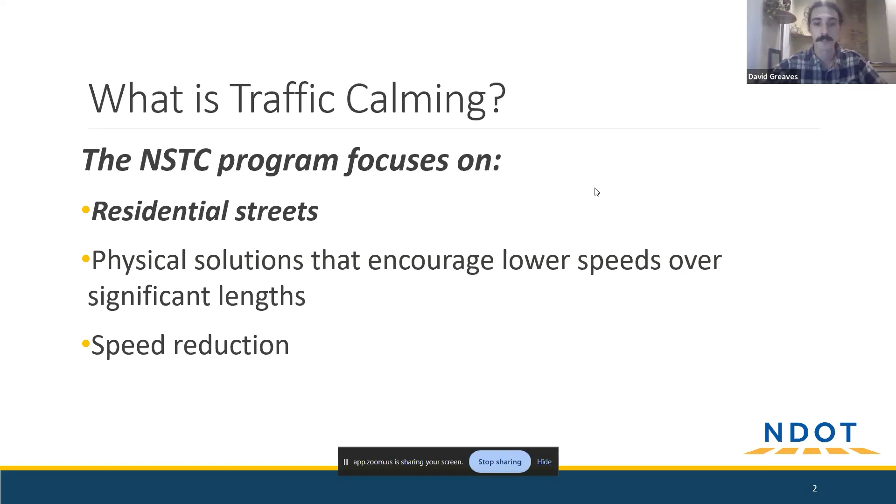I know that a lot of you were at meeting one, but some of you were not. So we're going to quickly cover some of the higher level program information, and that starts with what is traffic calming. The Neighborhood Street Traffic Calming Program, that's NSTC, is one that focuses on residential streets. We favor physical solutions to encourage lower speeds over significant lengths. Basically what that means is we don't choose one block at a time, and we're really shooting for speed reduction as an outcome of these projects, among other things.

There are 3 E's in traffic calming: education, enforcement, and engineering. Engineering is bold and underlined here because that's the piece that NDOT has the greatest ability to affect. So I'm an engineer. We're seeking to help McFerrin experience a better roadway environment with an engineered design, rather than only relying on educating people about speeding and driving safety. And certainly we don't want enforcement to be the only tool that helps people drive safe in your neighborhood.

This connects really closely with safety and Vision Zero. For anyone who's not aware, Vision Zero is the idea that nobody should have to be seriously injured or killed on Nashville's public roadways. Where this relates to speed is demonstrated by the infographic on the screen here.

Essentially it states that if somebody's hit while they're walking by a vehicle going 25 miles an hour, they have about a 90% chance of survival. Now, as that speed climbs to 35 or even upwards of 45 miles an hour, the chance that they live from being hit starts to go way down. So in neighborhoods where we know that people want to walk, particularly where there are things like schools and parks nearby, it's really important that we make sure people are following the speed limit and driving appropriately.

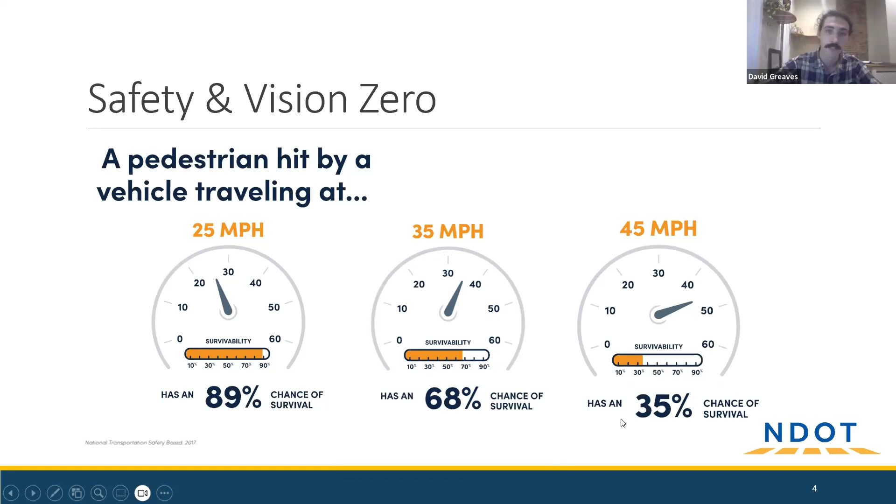Ideally, just having the speed limit would be enough, but often we see streets that experience high speeds, even though they are in neighborhoods like yours.

This is a really popular program. In August of 2024, when McFerrin was selected, we were choosing from over 500 applications in the queue. We were only able to choose 25 streets. Every 6 months or so, that's about the amount Nashville selects to do traffic calming. But what that means is out of all the streets that have applied for traffic calming, the data we collected and analysis we did on McFerrin made you all rise to the very top of that list. So that indicates to us that you do have a lot of cars driving on McFerrin, often at high speeds.

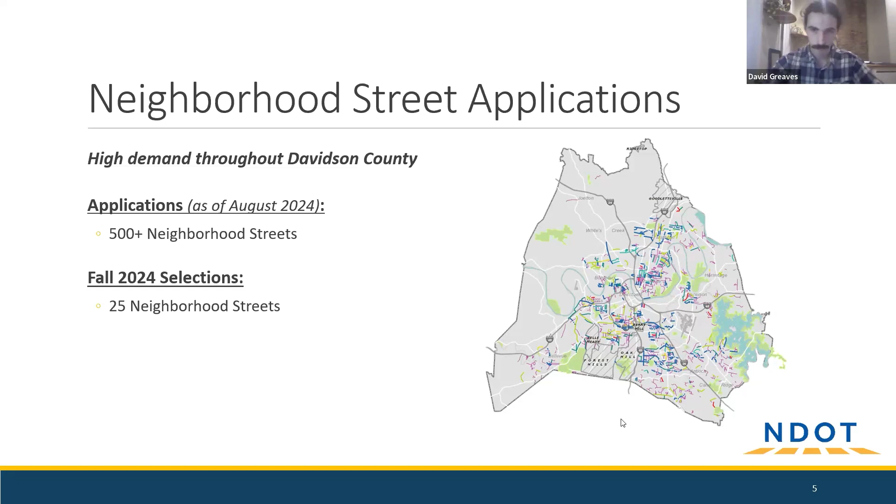There are a few things in NDOT's traffic calming toolbox, but a lot of other things that Metro does. So we want to take these meetings as an opportunity to publicize Hub Nashville. That's a number, a website, hub.Nashville.gov, and it's an app. All three of those are ways to basically make requests of Nashville's government. So it could be about traffic calming or road safety in general, or anything down to like potholes, debris, you name it. It's got a lot of really good resources on there to help people make requests.

This is the map of the traffic calming project. I believe these were the extents that were applied for, and it is McFerrin Avenue from Main Street on the southern end up to West Eastland Avenue on the northern end. We also see that we have 3 schools in the vicinity of McFerrin, and then Frederick Douglass Park is over to the west. I believe all 3 of those things were helping you all get prioritized for this project.

What we're looking at here is a screenshot of Nashville's online traffic calming tracker. You'll notice, in addition to the yellow highlighted line that's McFerrin, there are a handful of lighter magenta lines. Those are all other applications that we have not yet selected. The blue dashed lines are streets where we've already been able to install traffic calming.

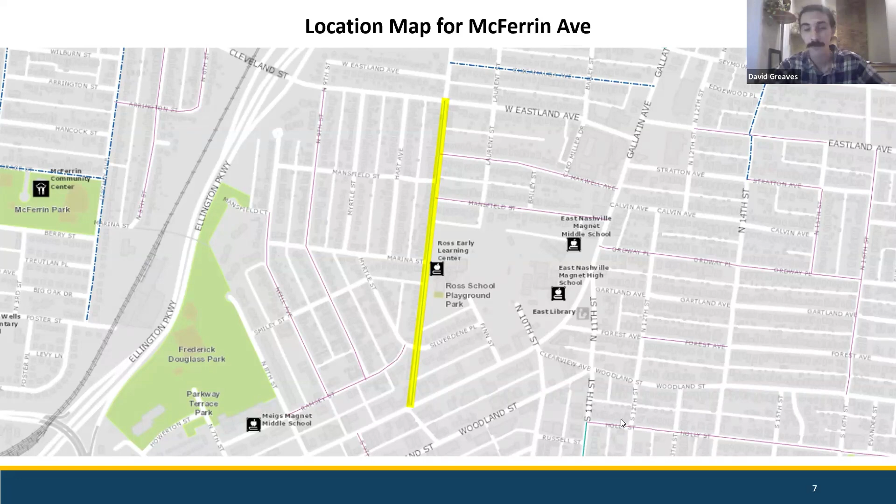If anyone is unfamiliar with what a project like this looks like, you could go over to Chickamauga Avenue, check it out, as well as North 14th Street. Or if you want to cross the tracks over into McFerrin Park, Lischey, Grace, and Meridian all have traffic calming installed as well.

In the last meeting, we talked about a pretty wide range of options. We reviewed a concept design that we put together. Now I'm going to present the measures that we ultimately decided on for the final design. But that doesn't mean we can't talk about or take questions on some of those other devices.

As is pretty typical in the traffic calming program, the core of this design relies on speed cushions. These work a little bit like speed bumps you might see in a grocery store parking lot, but they're stretched out along the length of the road to achieve a higher target speed. A speed bump is really for like 5 to 10 miles an hour. These are designed to be driven over at around 20 to 25. All that is to say, we're not asking people to really crawl over these.

We're essentially putting down devices that are intended to encourage people to drive at or around the speed limit. They're about 3 inches high, 6 feet wide, and on this particular street, we're going with 10.5 foot long speed cushions.

The width there is pretty specific. It's intended to basically be large enough to affect personal vehicles, cars, light trucks, that kind of thing, but have less an effect on larger vehicles with wider wheelbases, those being fire trucks and ambulances. They're not perfect, as certainly a fire truck may hit the tapered side area of the ramps, but they're designed to minimize the impact to those vehicles.

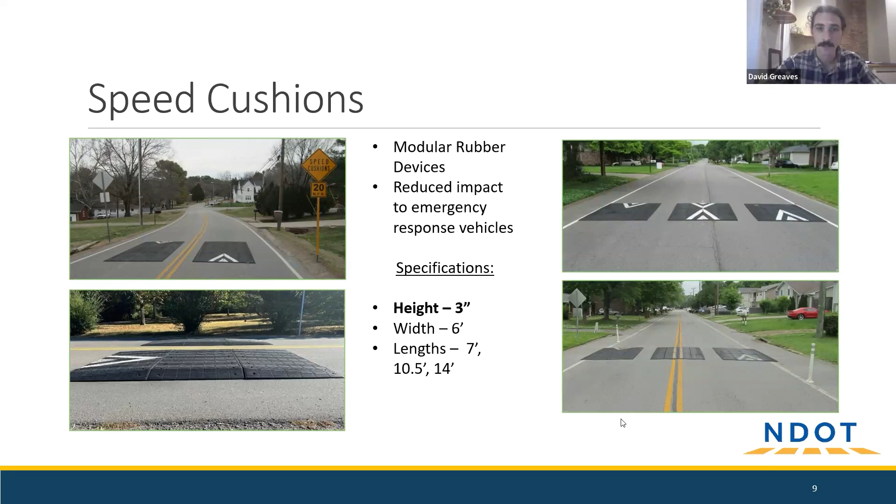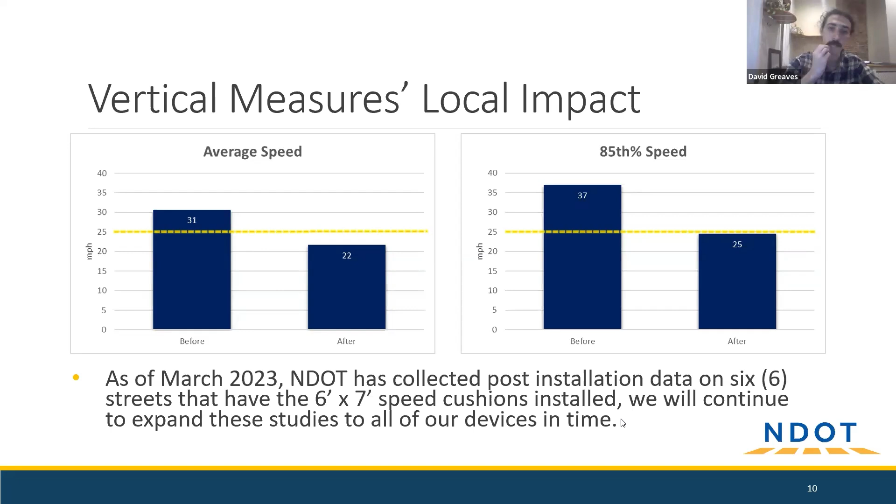I mentioned that we pretty often rely on speed cushions for traffic calming, and we do that because we know it's a fairly efficient investment of Metro's funds for infrastructure. When we conducted a study of before and after traffic calming projects with 6 foot by 7 foot long speed cushions, we found that the average speed on those streets came down from 31 miles an hour to 22 miles an hour. The 85th percentile speed came down from 37 before installation to 25 miles an hour after installation. If I recall correctly, McFerrin had an 85th percentile speed right around that 37 mile an hour mark when we measured. So we're hoping to see some pretty significant decreases in speed if this project is installed.

In addition to that, we talked a lot about bulb outs. We're proposing 3 sets of these along the length of McFerrin, and we'll be able to look at the specific locations in just a minute. While we're here, I want to point out that these are intended to shrink the intersection that may be a little larger than it needs to be, for the purpose of reducing turning speeds and shortening crossing distances.

On large intersections, we can tighten the turning radius, and that slows vehicles as they're making a turn. That's a benefit for crossing safety on its own because it gives a driver more time to see if somebody is in the crosswalk that they're turning into. But it also improves the pedestrian experience by limiting the amount of space they have to traverse while conflicting with vehicles. So it's kind of a double-edged sword there.

It also improves visibility of crosswalks that may be affected by drivers parking too close. The typical code in Nashville is that you shouldn't be parking within 30 feet of a crosswalk. That's because we want drivers to be able to see when people are waiting on the sidewalk to cross the road and have the opportunity to stop and let them cross.

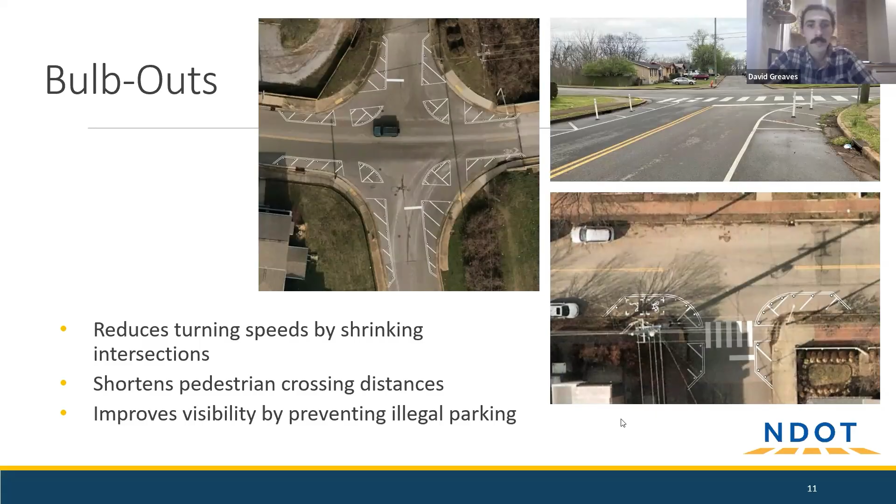That was a lot of information pretty quickly, but I want to pause and just take any questions that have come up so far. Next, we're going to just page through the plans, and then after that, talk about how this project moves forward in the process. But do I have any questions?

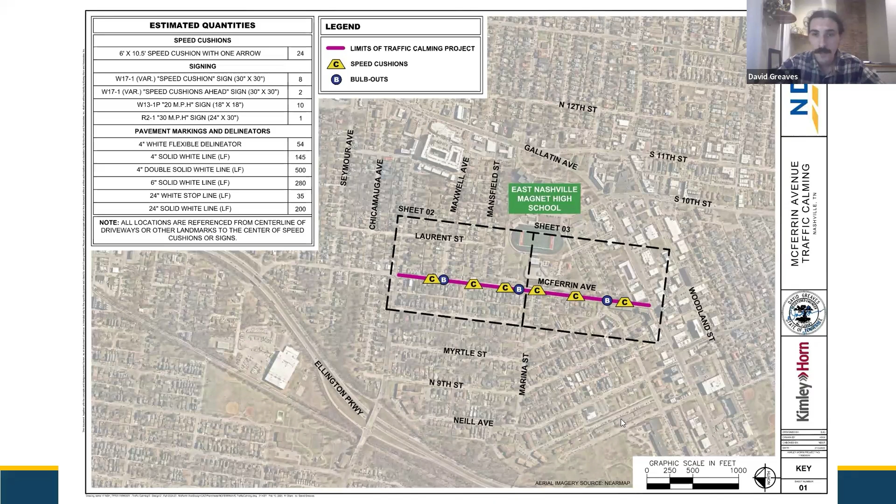Moving from west to east, Cleveland Street is over here on the left. We have a set of speed cushions right before you get to Maxwell Avenue, then the bulb outs immediately after at Maxwell. The next set of cushions is between the two legs of Mansfield Street. These are all between about 390 and 450 feet apart. We try to achieve a really even spacing whenever we can. It's not always easy with driveways and things like that, but we were fairly satisfied with the spacing we were able to find.

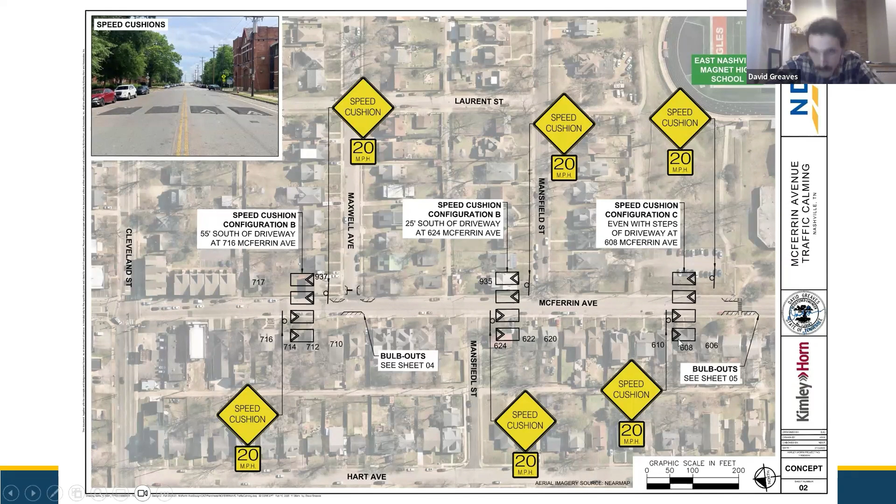The next set of speed cushions is right before the crosswalk that heads over to the school. Next is right in front of the school, just past Marina Street—I'm placing a set of cushions at that location. The next one is right in front of 114 McFerrin Avenue, between Silverdene Place and the entrance to the school Circle Drive.

Next, we have bulb outs at Myrtle Street, Silverdene Place, and McFerrin Avenue. Those four crosswalks exist already, so we have them noted just in case these are the plans that get repaved, to make sure those aren't left off. But the bulb outs are there to make those crossing distances a little shorter, as well as make sure nobody's parking too close to the crossings. Then we have one final set of speed cushions in the block between Silverdene Place and Gallatin Avenue / Main Street.

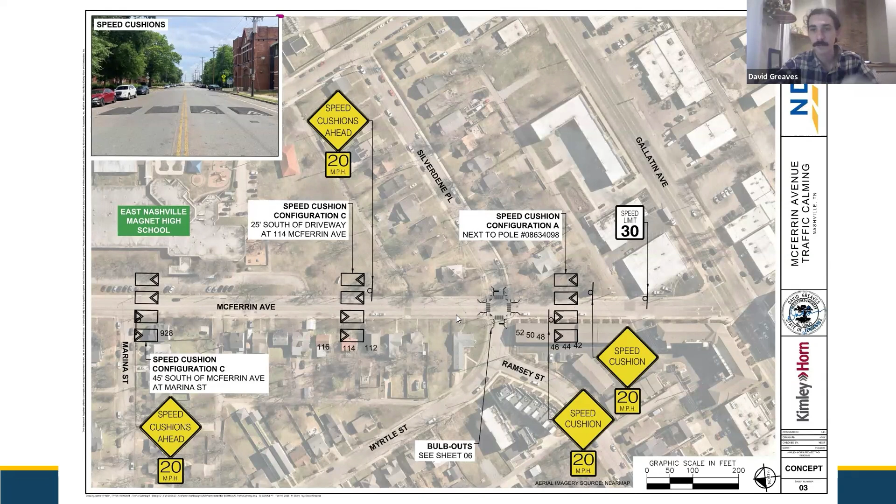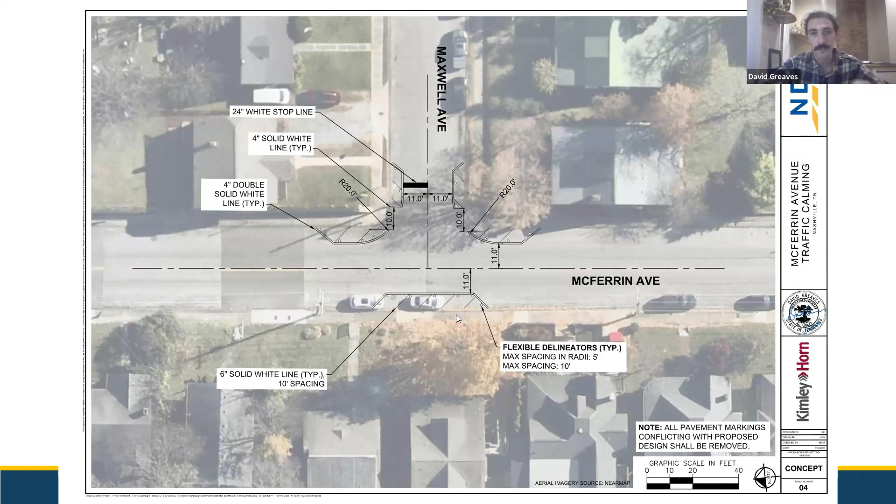Zooming in a little bit to Maxwell and McFerrin, this is that set of bulb outs. We're refreshing that white stop line just to make sure it's abundantly clear what's going on there. We do use these as an opportunity to narrow the roadway—that's an intersection safety goal in mind—but these will generally be constructed with paint, usually white paint, and those flexible delineators.

Here are the bulb outs at the crosswalk. You'll notice there are not 4, but 3. The reason for that is if we put a 4th one on this side, we would be blocking the driveway to the school. So there's really no need for a bulb out there because we would not expect anyone to be parking immediately in front of that circle drive.

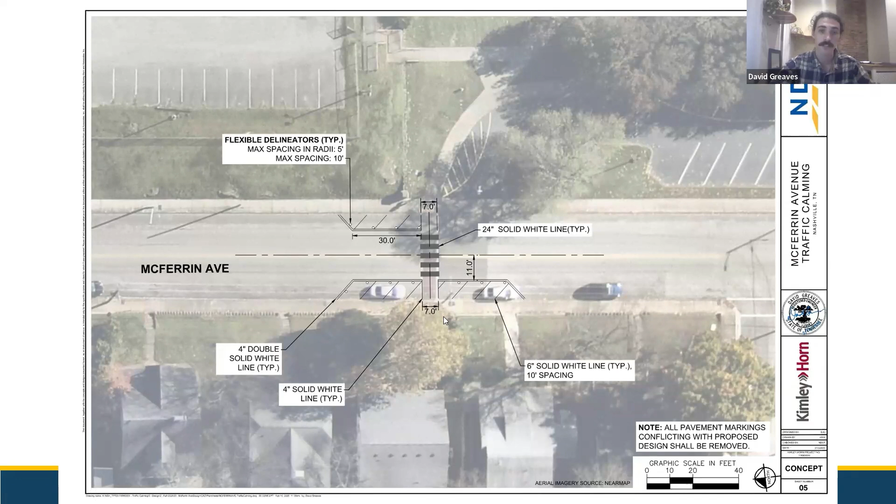What is important to know is that parking immediately adjacent to the crosswalk is what we're discouraging here. So should these be installed, we'll go ahead and move those no parking signs to that 30-foot distance from the crosswalk.

The last page of the plans is a construction detail bird's eye view of what these cushion configurations look like. You'll notice that we have 4 across, where on most streets we'll have 2 or 3. That's because McFerrin is pretty wide as streets go, as I'm sure you all know. The idea here is to place enough cushions that no one is able to drive around them and continue going at a high speed. We want to cover the length or the width of the road so that they're not ignored.

That is all the plans. I'm happy to go back to any portion if anyone wants to take a closer look at any of the spots, but that was the quick run through of the design we're looking at.

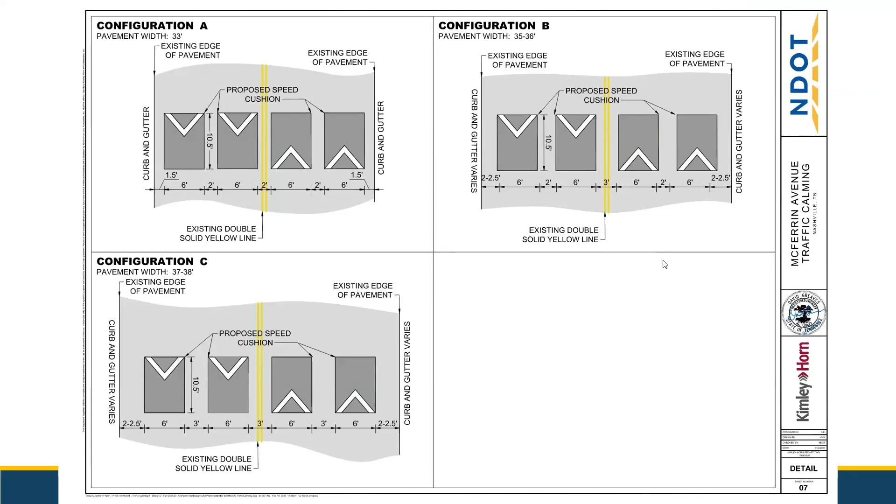I imagine these things are going to be quieter than the speed bumps we're familiar with that are made out of concrete and are more aggressive. Is that fair to say, as far as noise goes? Okay, for sure. Thanks.

Anyone else? Okay, well we can come back to this if necessary. I'll go ahead and keep moving along.

Then you all were selected to have traffic calming installed. We did our first neighborhood meeting in mid-December, where we presented a rough concept of what we had in mind. Then we did a field review—a couple weeks ago we went out to McFerrin, spent a few hours on site collecting data about the grades, double-checking the width of the road, experiencing it for ourselves, making sure we understood what you all were observing and experiencing as residents on McFerrin. After that, we completed our design and drew up those plans.

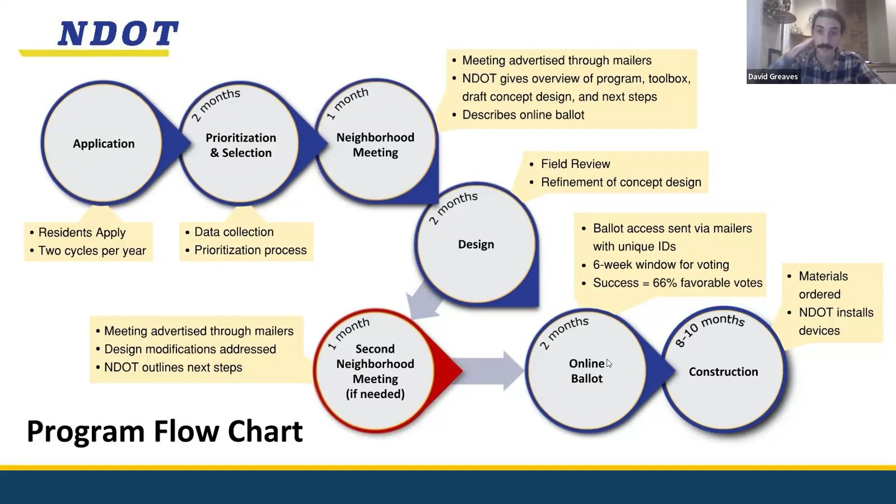It's not 8 to 10 months because it takes that long to build these—it's just how long it takes to get to the front of the line to be built. For better or worse, there are a lot of traffic calming projects slated to be built in Nashville, and NDOT will just get to this one as soon as they can.

A little bit more about the balloting. This is what the postcard looks like on the back. It'll have the date that voting closes printed in the top right corner, and in the bottom right there's a unique ID code. That helps us verify that all the votes we're getting are accurate and not coming from strange places.

You're able to vote yes or no—there's no maybe, you would just abstain if that was your thought. Like I mentioned earlier, if 2/3 of respondents vote yes or more, the project will move forward. Should we get 50% yes, 50% no, that project would not be successful, and what we've just seen would not be installed.

So we're leaving it sort of in y'all's hands as the residents.

This next slide is just a bit about who is eligible to vote. So essentially to generate this mailing list, we pull the property records from Nashville's mailing list generator tool. Basically, we draw a polygon around all of these parcels that abut the affected right-of-way, McFerrin Avenue in this case.

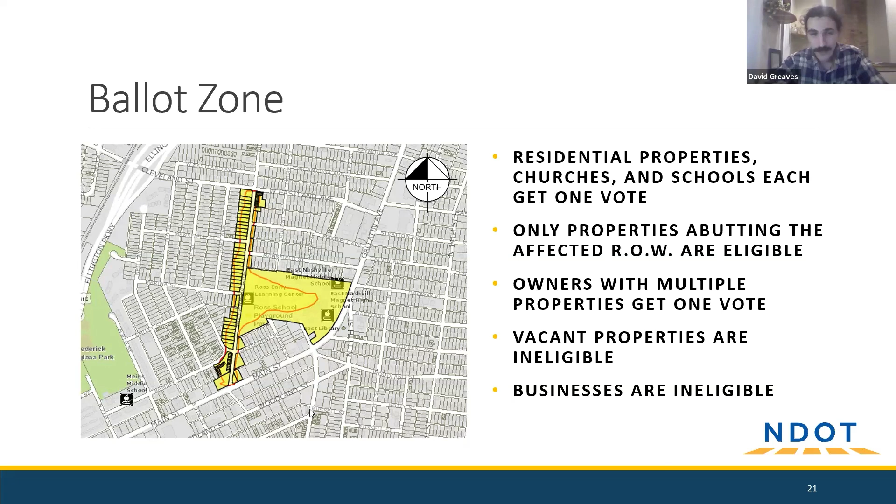I think that's all I had to cover on balloting, which brings us to just kind of our general questions. I've also got my contact information somewhere at the end here. Any questions from the group on the traffic calming, balloting, any of that?

After this, I'm going to give a brief jump into the bikeway side of this, but want to make sure that we talk about traffic calming as much as we need.

The 66% yes vote needed - does that mean you need at least 66% of the people highlighted there voting, or just as long as the yes votes are 66% or higher? The second one. So theoretically, if 6 people out of everyone voted and 4 of them voted yes, that would be considered a successful project.

It would be a pretty huge undertaking to get every one of those property owners to vote, and even 2/3 of them is quite a lift. Anyone else?

So when do you think we would expect that those ballots would arrive? That's a good question. So the design, for all intents and purposes, is finished. So we could be publishing those online and then sending the mailers out as soon as next week.

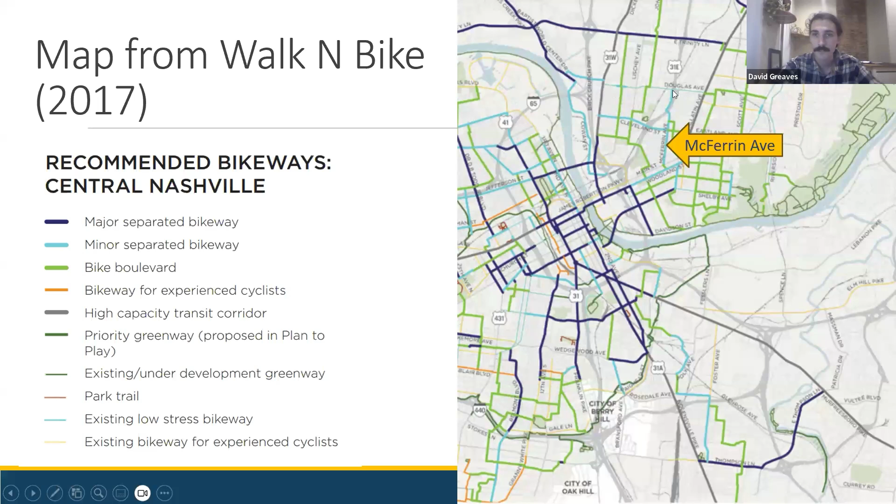So here are a couple of maps. This is from WalknBike as published in 2017. We can see here McFerrin Avenue runs north to south and is the main connector that gets you from Woodland Street and Main Street north up to Douglas Avenue. There are a whole lot of other bikeways around here, and we're excited for each of them, but this blue line is what we're talking about tonight.

This is the interactive map from Choose How You Move, so this may look familiar if you know the recent transit referendum. Here it's labeled as a protected bikeway, shown by those double dashed lines. While we're zoomed in, I want to note it connects to a whole bunch of other intended and existing bike infrastructure. Up on Douglas, we have existing bike lanes. Down on Main Street, there's no bike infrastructure yet, but there is high frequency transit. So if you were making a trip that connected a bike ride with a bus ride, and maybe another bike ride at the end, there's that opportunity as well.

Just so everyone's aware and curious about what a protected bikeway is, this quote is pulled from WalknBike 2022 and serves as a loose definition of what that means in Nashville. Basically, we're talking about bicycle lanes with a designated buffer space and physical separators.

I pulled an example of what that could look like from Google Street View. This is Buchanan Street, a project implemented in 2021, but this kind of infrastructure is probably familiar to most of you if you spend time driving around Nashville. Basically, the advantage is you have vehicles in the center doing their own thing, with space to keep the modes separate and safe. Then generally on the outside, we have the bike lanes where people will be riding, physically separated in space from vehicles, not necessarily by crash-worthy separators, but by visual impediments to vehicles veering into that bike lane space.

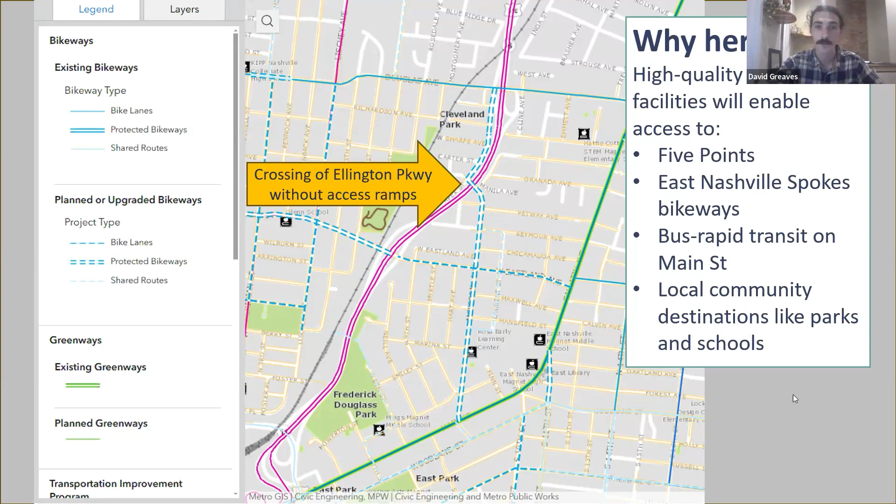This will hopefully provide access for people beyond the Maxwell Heights neighborhood to go to places like Five Points. Once East Nashville Spokes, another bikeway project, is installed, we'll be able to get downtown in a safe environment. Really, we're just hoping this will provide a link through the neighborhood and give access to the restaurants and other amenities in your vicinity.

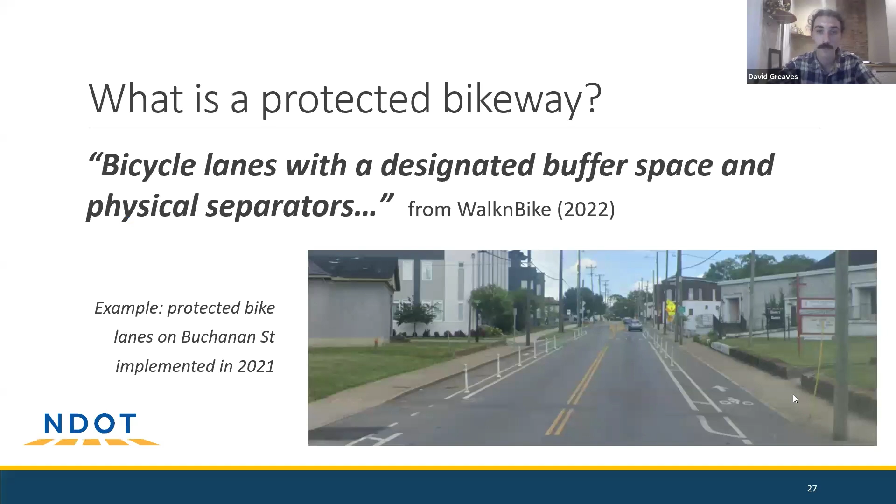So what is next? Before this project is implemented, we need to do some more data collection. We're looking for a traffic analysis to make sure we understand the impacts on people driving, as well as a parking analysis, because we know there's often a trade-off between bike infrastructure and parking on the public roadway. We're also going to develop conceptual plans, so you'll have an opportunity to look at more detail than this image, drawing up a plan for what's going to be put down.

Then we're going to conduct additional community engagement. I'm really happy you all were here hosting us tonight to talk to your neighborhood about this project, but we also want to connect with a broader audience and make sure anyone who could be impacted by this infrastructure has the opportunity to weigh in. Lastly, we'll need to produce design drawings that can ultimately be given to the construction crew to put this in place.

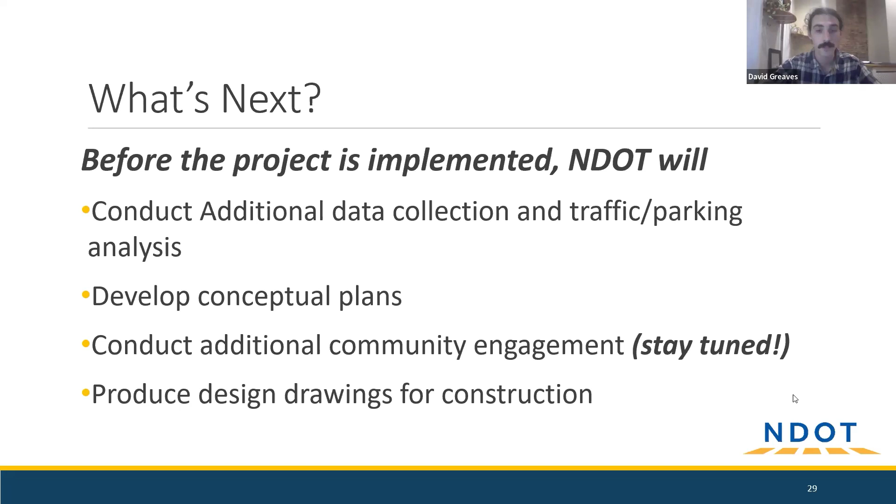So that was a lot of information. I'm sure you have questions, and I'm here to answer them as best as I can. This is a project in its really early stages, so a lot of details have not been filled in yet, but I'd love to hear any thoughts that you all have.

This is Bill speaking. One of the things that's kind of unique about our section of McFerrin towards the south, adjacent to the school, is the parking is very different on the east side versus the west side of the street. On the school side, there's parents dropping off kids in the morning, and they park - there's 3 or 4 blocks of parking during drop-off, and same thing in the afternoon on pickup. So there's really heavy demand for on-street parking at the school and a block or two both to the north and south of the school.

For those of us who live on the non-school side of the street, we have little issues with driveways because we have a grade elevation between the street and our properties. So there's a fair amount of on-street parking also on that west side of McFerrin. So there are some complicated things that need to be looked at to understand how a bike lane would or wouldn't work on one side versus the other when it comes to this stretch of McFerrin.

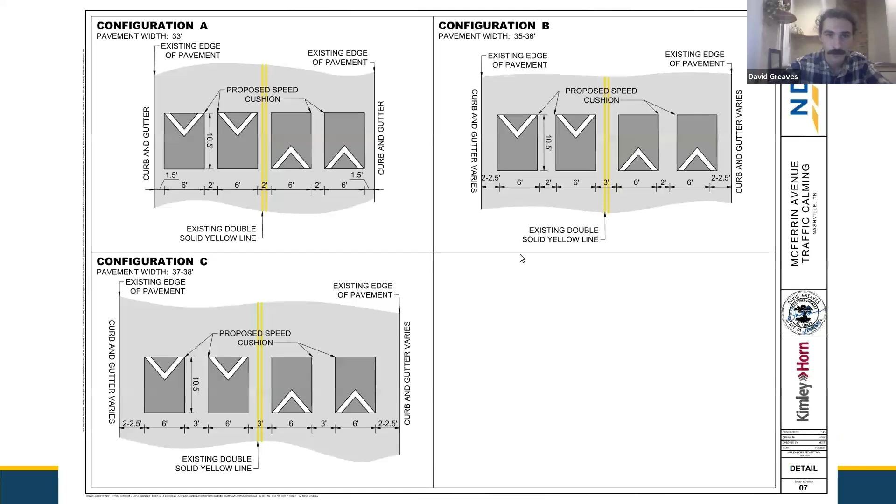Yeah, that's absolutely correct. The standard transverse line approach is not one we like to take often, particularly on roads like this, because at higher speeds you need more time to see that thing from further away. So that's why we've drawn the longitudinal bars that point at vehicles, and then you can see that zebra stripe from a much greater distance. They're called high visibility crosswalk markings, and they're NDOT's standard nowadays for that very reason.

That's great. 20 years ago it wasn't an issue because McFerrin was hardly used, but that's changed dramatically over the years, in the past 5 years. Yeah, for sure.

One thing, David, when this does go to balloting and those go out, can you let us know, whether that's me or me and David, or whatever list of emails you have? Because something that's really important I've noticed is the participation rate is sometimes not as high as we would like. So we may want to have neighbors, specifically the folks on the street, very intentionally talk to neighbors that you know, and maybe some you don't know, about making sure they participate in the voting, and help them understand why this is important.

Because sometimes if people just zoom out and they're like, oh, a bunch of stuff going on the street, what's the point of that, they might say no. But if they understand that we have the early learning center, and we have these issues with speeding, and this is going to improve things, most people are like, oh yeah, that sounds pretty good to me. But if folks just think it's some clutter and don't understand why we're doing that, they might vote no. So it's really important to talk to neighbors once these ballots go out, in that 6-week window, to make sure everybody knows what we're voting on, and hopefully vote yes, but more importantly, that they have the opportunity to weigh in.

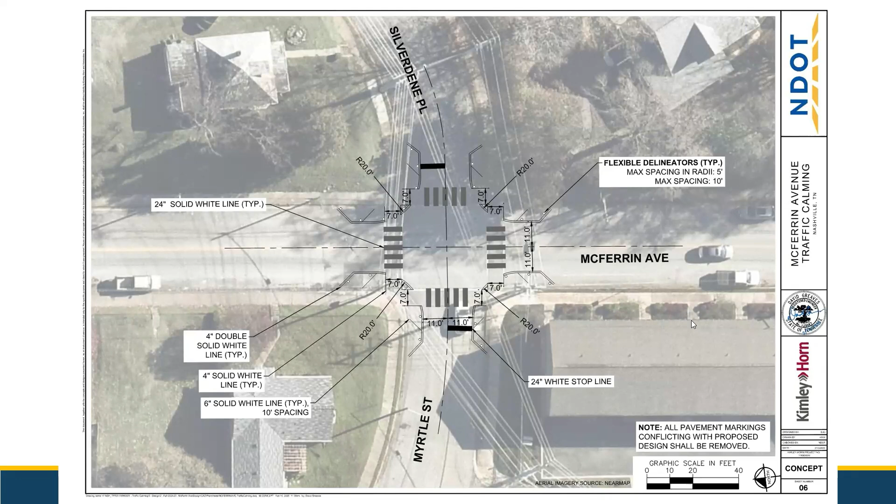And I think that's a great idea, Sean, that if we know when the ballots go out, then we have an opportunity to make sure we talk to our neighbors, and just highlight it when the ballot goes out so it's fresh in their mind. They get it in the mail, they hear from a neighbor. I think that's a great way to kick it off. Great, will do.

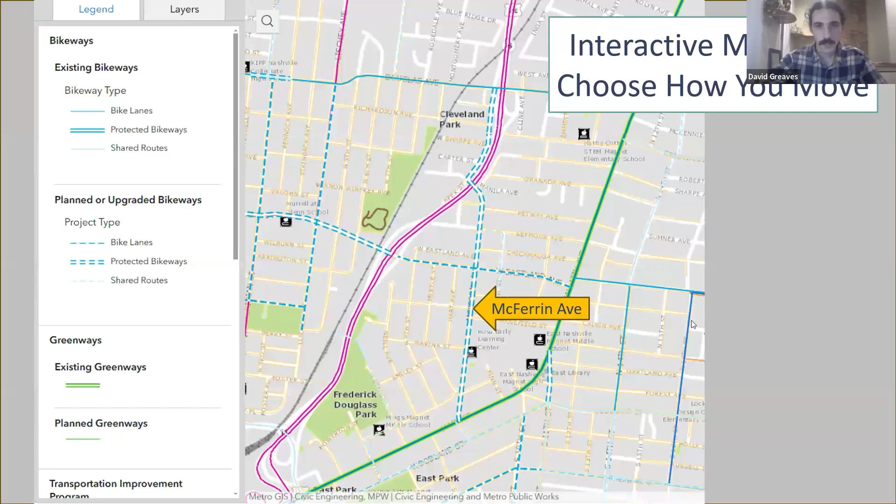Any final thoughts, questions? Well, it sounds like I can wrap up. Is that the last agenda item for the neighborhood meeting? The last thing was just if Sean has updates. So we can, yeah, if you have other things to do.

Thank you so much, David. That was really helpful and will at least allow those of us that heard it to also share this information with other neighbors over the coming weeks. So appreciate you taking the time.